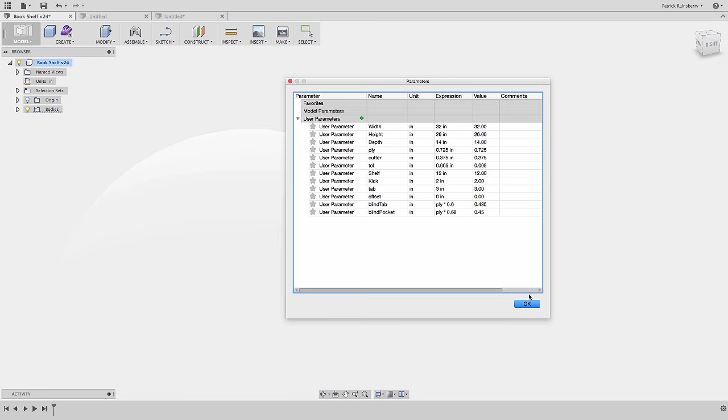Some things I didn't even end up using, like this tolerance gap, which I could reference if I wanted to put a gap somewhere. Things like shelf kick, the tab width, and also something like a blind tab, where I don't want to go all the way through the material — I'm going to say only go about 60% of the way through. So these are the types of things you create as parameters, and then we're going to use them as we go work on this design.

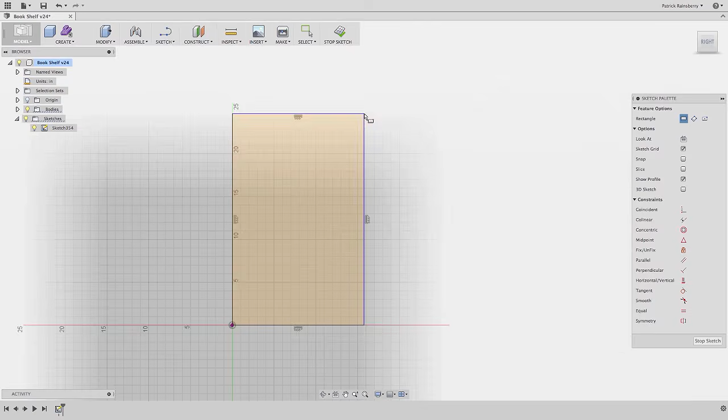The first thing we want to do in this design is create a sketch to represent the profile of the bookshelf. So I'm going to say sketch, create sketch, sketch on the side profile face, and start by creating a rectangle. We'll draw some arbitrary shape and then give it a dimension. Here we're going to leverage those parameters we created — instead of typing in a number, I'll type in the word height, and it will show me what that value is. Same here for depth.

Now I can come in and create some more rectangles, and these will define the different pieces. So the top will have a shelf, we'll have a bottom shelf, a little kick plate here, and then a piece along the back.

Now it's just a matter of creating more dimensions to define the sizes, so the thickness of all of these is going to be ply. This is one of the real advantages of adding this parameter all over the place — we'll create these dimensions of ply, and once you're ready to cut this and measure your material very precisely, you just go in and change that parameter for ply, and all of this updates, so all your thicknesses and everything else stay up to date. Same if you decide you want to change the design — we'll just type in the word kick here.

Again, we'll do up to here. We change this. This is called shelf. So if you ever want to change some of this stuff, you can just modify those parameters.

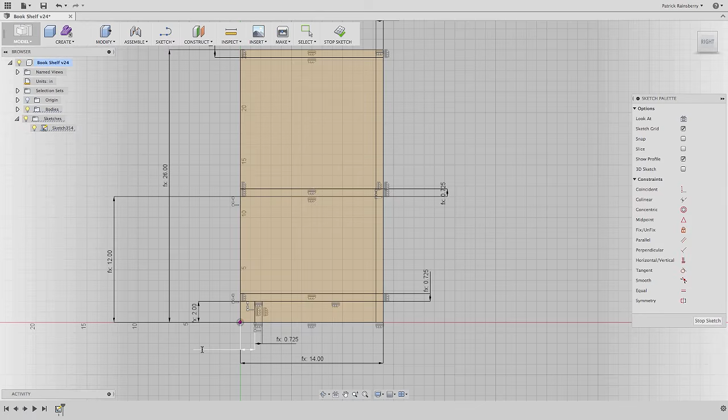If you do want to use a specific value, for example like this, maybe you just know that no matter what, that's always going to be fixed. We just always want that to be 1 inch. You can type in a regular number at any time in these dimensions as well.

And now you've got your overall sketch profile defined. Now that I have this sketch done, this kind of outlines all of the parts in the bookshelf. Now what I want to do is start creating individual components.

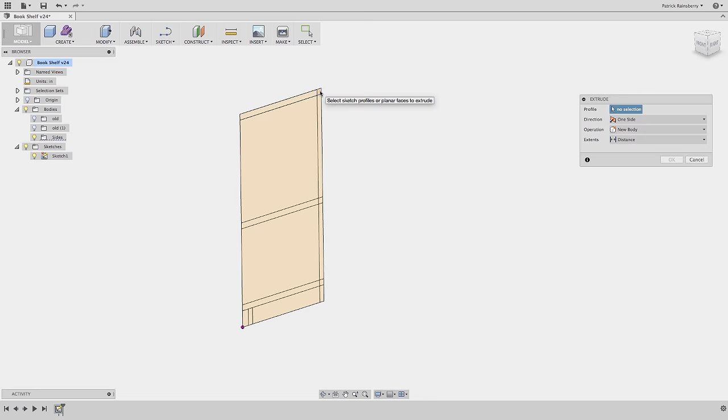So to do that, I'm going to create an extrude, and then I want to pick the sections of this sketch for the given part. So in this case, I'm going to start by creating the top. So that's going to be that profile and that.

So you should pick 2 things, and you can either just start dragging this out, but in our case we want to extrude this a specific value, and that is width. So that's going to be, again, a place where we're leveraging those parameters. You can do that here in the extrude commands as well.

And when I do that, it's going to hide the sketch by default. So if you want to do something more with that sketch, you can always come back over here to your tree. In sketches, you'll see sketch 1. You can show that, and we'll do it again because we want to create another piece here.

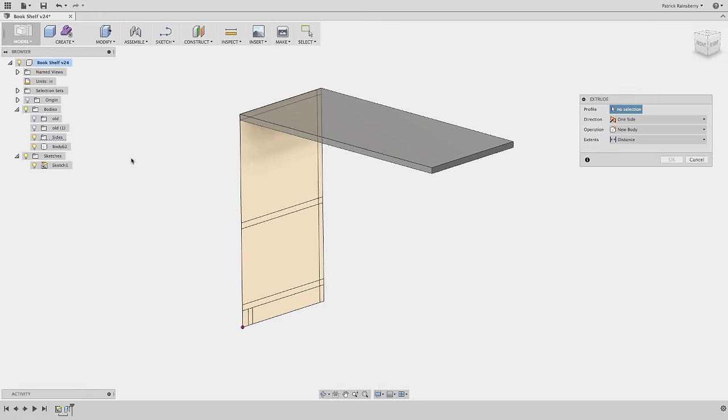So again, I'm going to say extrude, and here I'm going to create the side piece. Now this is going to be 1, 2, 3, 4, 5, 6, 7, 8, 9, 10, 11, and 12 sections. So again, this side represents all of those sections.

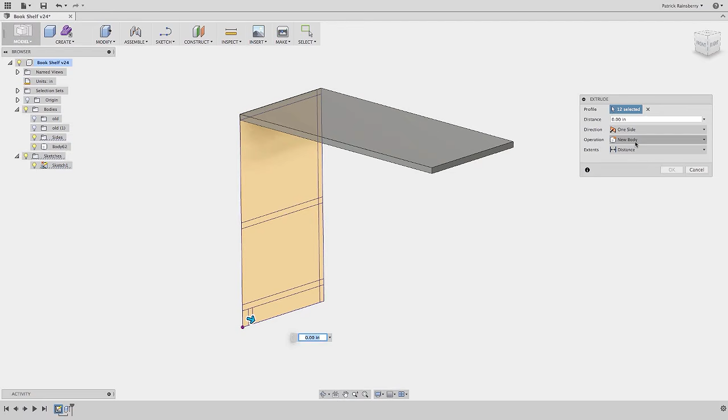So you just need to make sure that you grab all the sections, and we want to say new body, and for the distance here, this is where we're going to use that ply parameter to use our material thickness. And again, make sure the operation is set to new body. That's very important. And we'll say OK.

And then we can hide this sketch if we don't need it right now. Okay, now rather than re-sketch this, what I can do is I can just take this side piece and mirror it. So to do that, the first thing I need is a plane to mirror about.

So we're going to use construct, and we're going to create what's called a midplane. What you do here is you basically pick, say, something like this face, and then that is going to create a midplane right between it. So you can turn off all of your construction, or you can turn on and off this plane here.

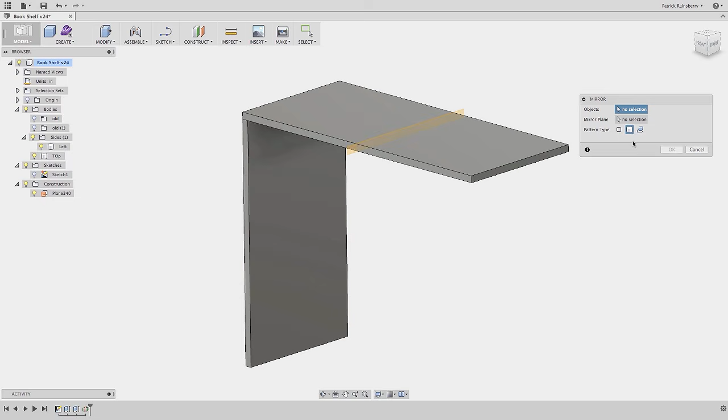That is going to be a plane that I'm going to use quite a bit through the rest of this design. And now create, mirror. I'm going to mirror. You want to select bodies in this case. So our pattern type is bodies, and our mirror plane is this one. And we've picked this body to mirror, and now we've got that part.

So that's going to be a technique that I use throughout this, which is to basically create one body and then mirror it across this center plane to leverage it over on the other side.

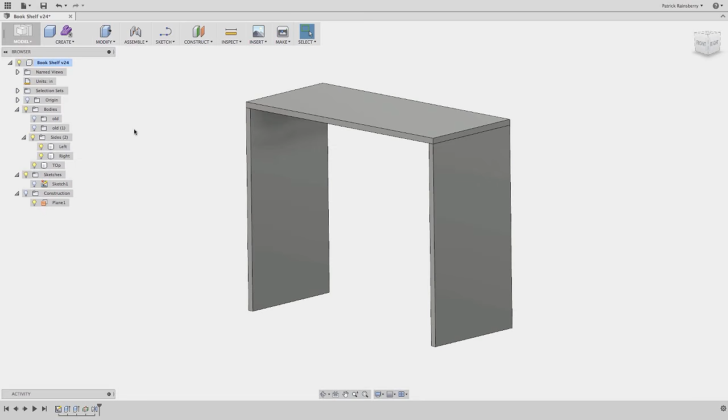So the next thing I need to do is to create the shelves and the back piece that are going to go from this inside face to the other inside face. So to start features that start from this inside face instead of from where we originally sketched it. So if you look, that sketch is actually on the outside, and we want to create some features from the inside.

The easiest way to do this is to quickly create a new sketch on this inside face, and then let's just hide some of this stuff for a second.

And I'm going to use the geometry from the first sketch, so project include. So what you're doing here is you're basically saying I want to just grab a reference to all of these lines from the first sketch. That way if anything changes in the first one, it'll be updated here.

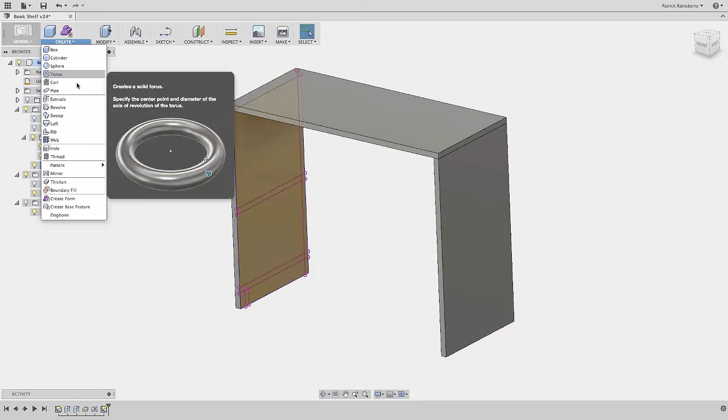And then we're going to use this new sketch to create some parts. Now we're going to use that sketch to create the rest of the components. So again, create an extrude, and here, rather than specifying a value, we're going to say we want to go up to the inside face there. That way you don't even have to worry about figuring out what that depth is supposed to be. And instead of join, again, we want to use new body. And now we've created the back.

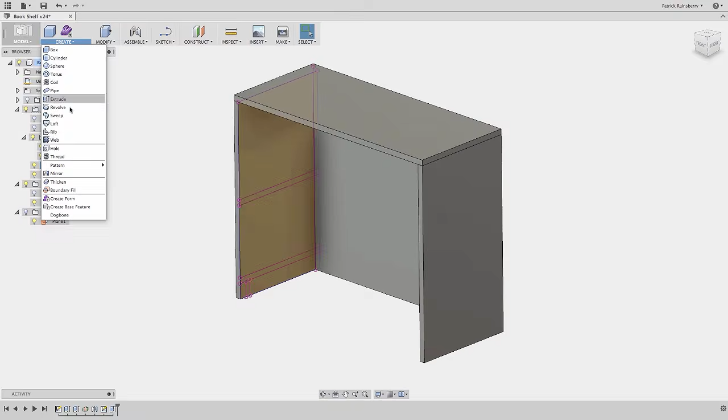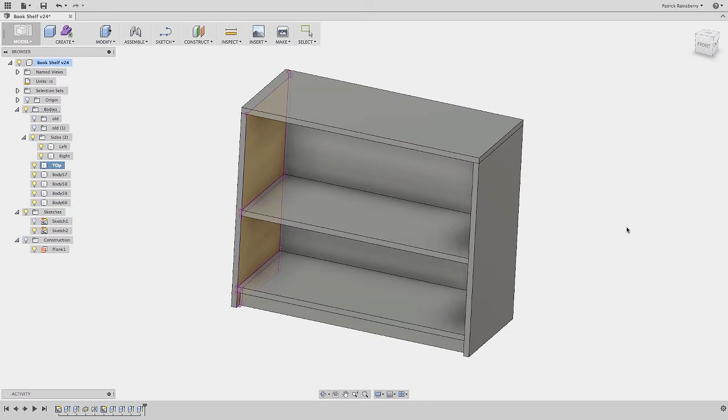Now we'll go ahead and just repeat that process. So create, extrude, and we'll pick this, which is our bottom shelf. And we will say we want to go up to this inside face, and it will be a new body. You can right click and drag up to repeat a command, which is kind of nice sometimes. So do that, say new body up to that face. And then again, down here, you can see the kick plate, and we'll go to that inside face. That looks good. And remember to always set it to new body, and we'll hit OK. Now you can hide that sketch.

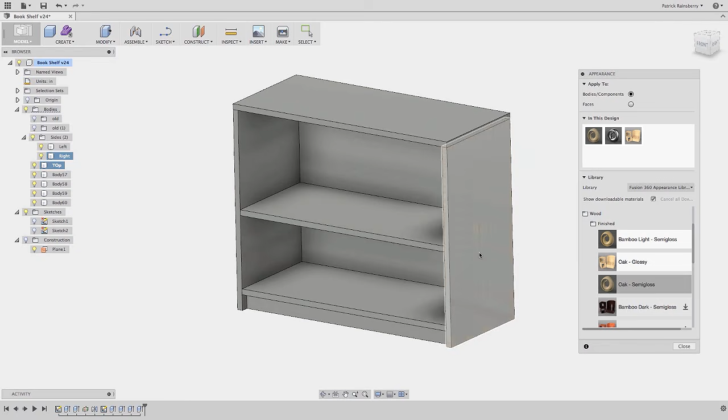Another thing that's nice to do here at this point is I'm going to apply an appearance. So again, I right click appearance, and you can browse into wood. So you can see here I've got wood finished, and I've got oak glossy, oak semi-gloss. Let's use oak semi-gloss, that looks pretty good. And you just can drag this out onto your parts. Obviously this isn't a necessary step, but it looks pretty good when you're modeling and you're kind of looking at it the way it's going to look.

I like it. So now that we have the basic parts, I want to create some tabs so that we can create the press fit joints between all of these components. So I'm going to hide all of the parts except for the kick plate, and you do this easily by selecting on the light bulbs here in the tree. Now I've got the kick, and I want to create a new sketch.

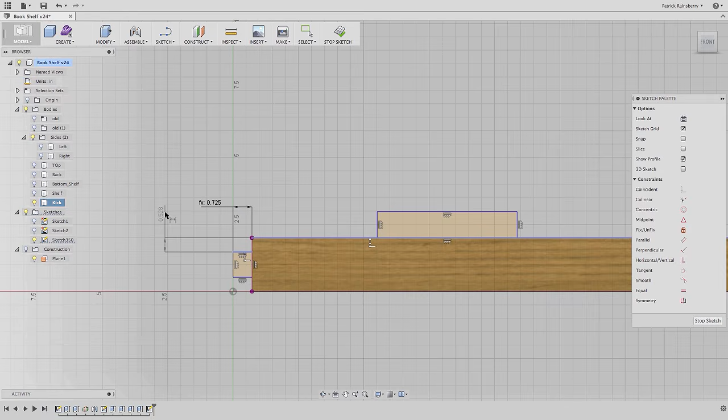I'm going to create a sketch on the front face here. I'm going to go and grab my 2-point rectangle tool, and we'll just draw these two tabs in kind of at a rough shape, and then we can go get dimension tool. So here I want the depth of this to be ply, so it's the ply thickness. Here's a nice thing we can do too, which is I can say, okay, I know that I have a parameter defined called kick, but I want this to be kick divided by 3. And then the same here. So we'll make the tab 1/3 of the depth.

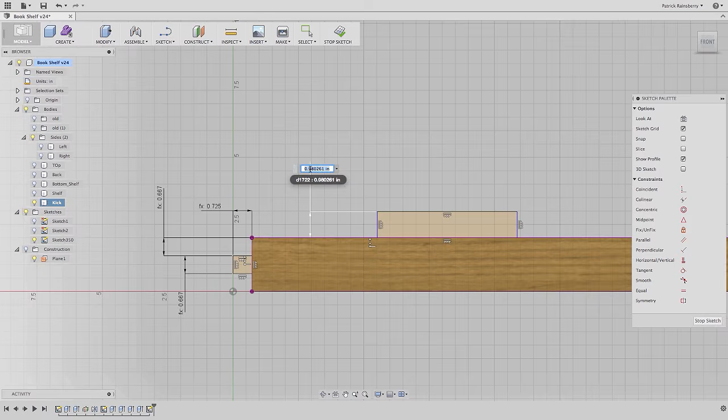So if you change that kick parameter, this will all update. Over here, also ply and tab. And another thing we can do that I use a lot is I'm going to create a quick construction line, so I'll create a line that just goes from that midpoint. You'll know you have the midpoint when you see that triangle. You can select the line, right click, say you want to make it construction. That way it's really just there for reference.

And now I can quickly create a dimension from the origin, which remember this is going to represent the actual edge of the bookcase. This is inset by the thickness of the side. So we want to go from here to the center, and then we want this to be equal to the overall bookcase width over 3. And that should put us right where we want to be.

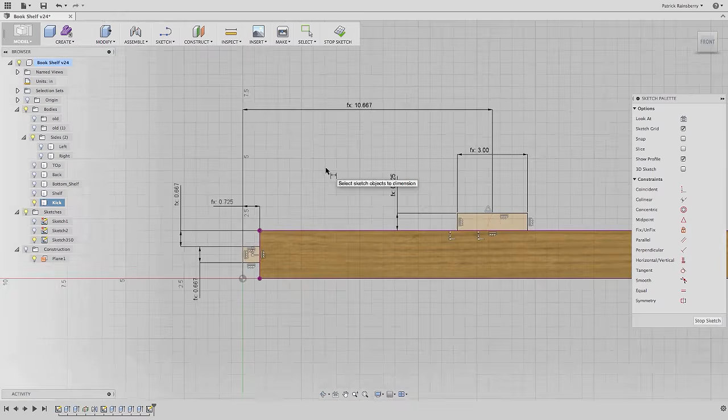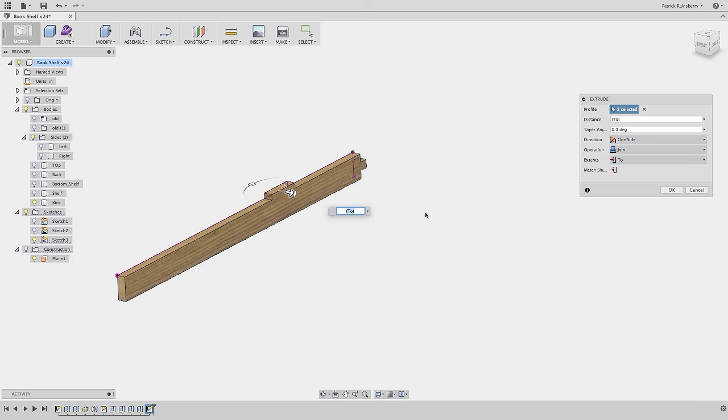Now we can use that sketch that we just created to create the tab. So I'm going to create an extrude, and we pick the two profiles. And here what I want to do is again use the extents. I want to set this to be To. I'm going to go up to that back face. And we'll go ahead and leave that as a join just so we can show one way of doing this, which is to use that as a join, and then I'm going to go ahead and create a mirror.

And there's different choices here. I can either mirror faces or bodies. Next I'll show bodies, but in this step let's use faces just so you can see the difference. So with faces, what I need to do is pick all of the faces of the component that I want to mirror, so a little more steps. So I'll pick those 3 faces, and then for the mirror plane, again we'll use that mirror plane that we created, and we get the result that we're looking for.

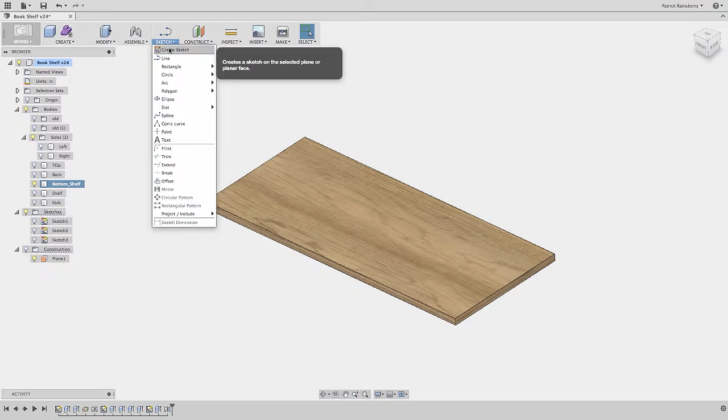Okay, so now let's create a sketch for the tabs on this shelf. So sketch, create sketch, I'm going to pick this face, and now we're going to create just the tabs on one side.

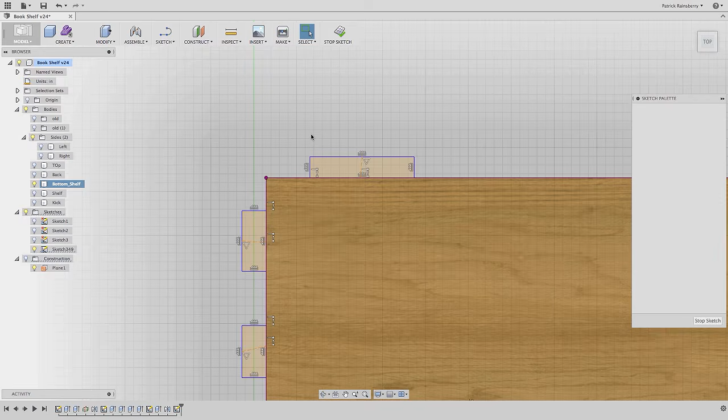And again, we'll create lines for the midpoint. I do this because it gives me a nice way to create a dimension to the midpoint of these rectangles. They don't really have to be straight or anything. Then pick them, right click, construction. Now those are just reference lines to give you that reference point at the center. It's not necessary, but I do it out of habit.

Now we'll create some dimensions, so we can leverage our parameters. The width is going to be tab, tab, tab, and then the height of all of these tabs is going to be equal to the thickness of our ply. Remember, the point of this is that if I measure my actual material thickness and modify that parameter ply, all of these tabs are going to adjust as well.

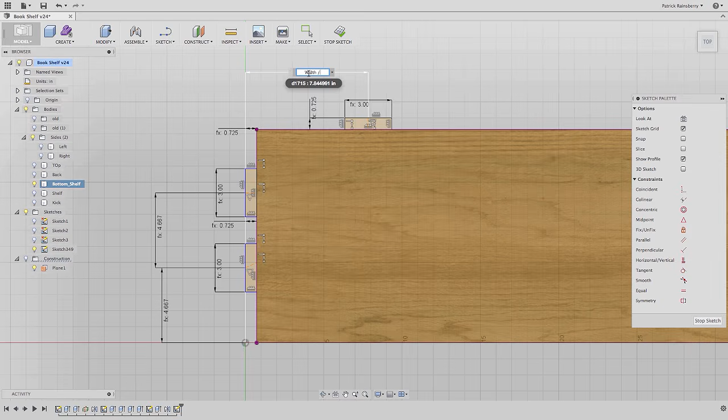So you're always going to have a nice perfect fit when you do it this way. We'll also take advantage of our other parameters here. So this is going to be depth over 3, this one will be depth over 3. Here again, you want to make sure you're going from the origin over to the center, not from the edge of the shelf. We'll call this one width over 3, and that should give us the sketch we need to create these 3 tabs.

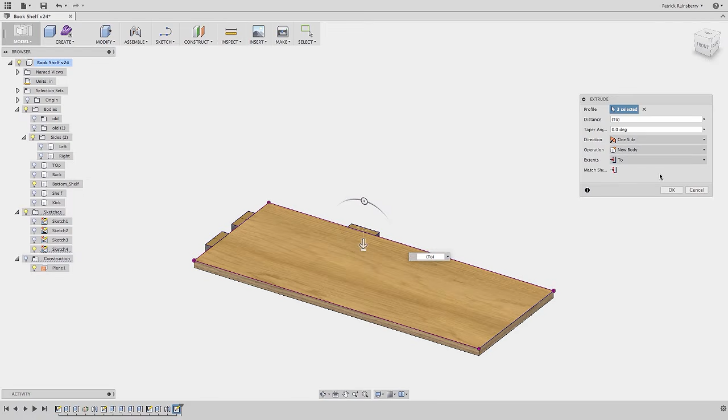Now we can create an extrude for these tabs. Grab the tabs, distance up to that face. But we want to make these new bodies because we're going to leverage creating these 3 and then mirroring them around. So we'll take those 3, then create a mirror of them, grabbing the 3 bodies and mirroring them around our construction plane here.

Now we've got these up, let's go ahead and leverage that for the shelf as well. Since we want the same exact tab pattern on that shelf, the first thing I'll do is quickly create a midplane between that face and that face, and that gives me this plane here. You can turn these on if you want. Then we can create a mirror, and this time we'll grab all 6 of these and mirror about that new midplane I just created.

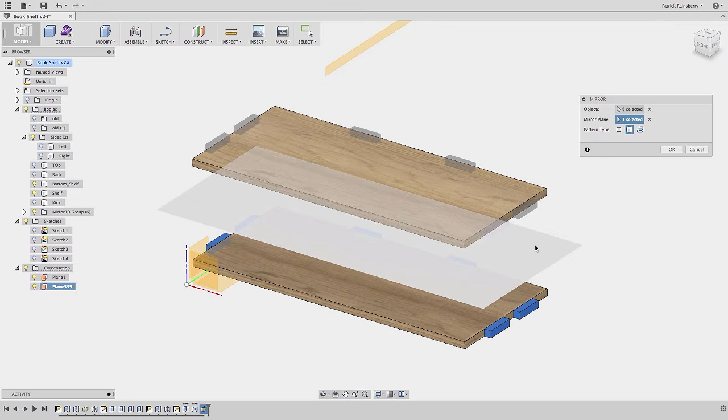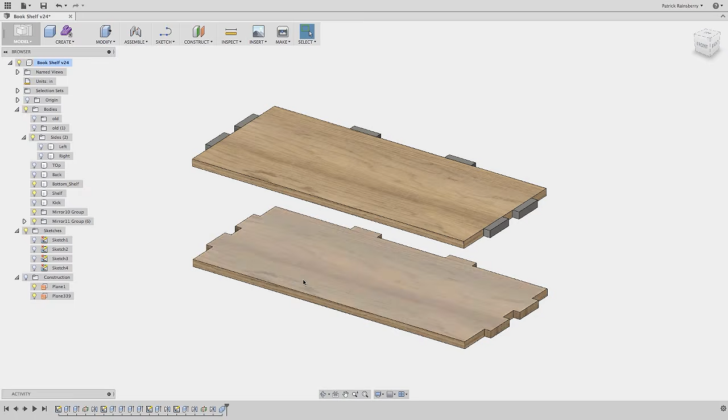Say OK, turn the view of that off. Again, light bulbs turn things on and off. And I'm going to use my combine feature, so set the target, and then all of these are the tools. Join, don't want to keep the tools. Now we've got that part that we want, and we'll do the same thing here.

This is why I like to make these tabs as individual bodies. Sometimes it's really just super convenient to mirror them around, copy them, and then combine them later. It just saves you a lot of work in the long run.

Okay, let's create the sketch for the tabs on the back. Again, we'll create the sketch. Sometimes you might want to rotate around so you're looking at this from the front so that you have the right perspective. And we'll create our rectangles. I just kind of draw these in an arbitrary place to start with, and then make my reference to the midpoint just to make it easier to dimension later.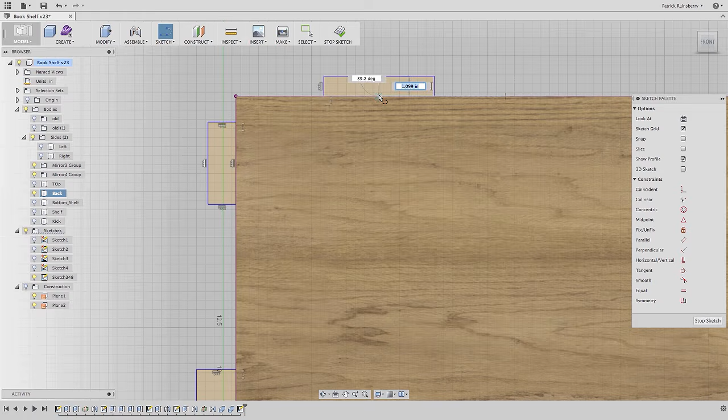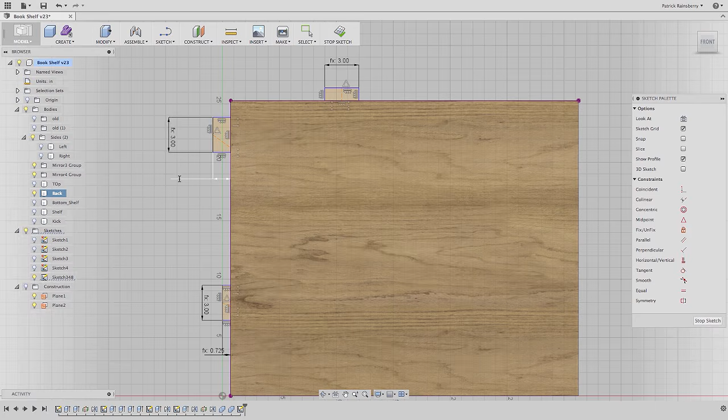And then we'll make these construction, so right click, construction, and now we'll create dimensions. Again, we're going to leverage all of those parameters. So the width of tab for all of these, and then the depth on these sides is ply, so we want that to go all the way through the thickness of our material. On the top, this is going to go into one of the blind pockets, so we'll call this one blind tab. And then for the position, we'll go from here to the center.

We want that to be height over 3. Center to center will also be height over 3. And then here, we just want to measure from the actual 0 point, not from this inside edge. We really want the outside edge of the whole bookshelf to this point to be width over 3.

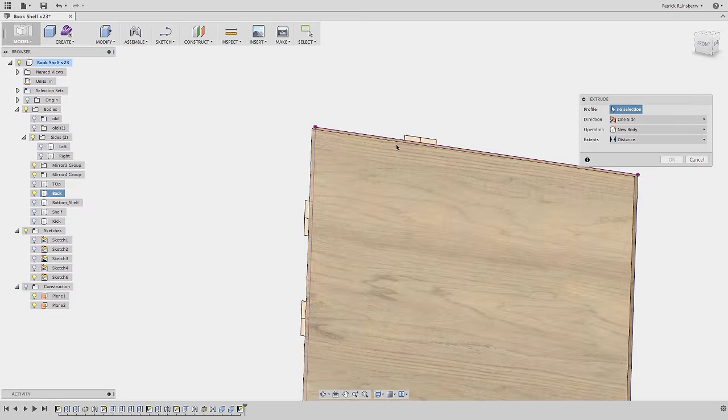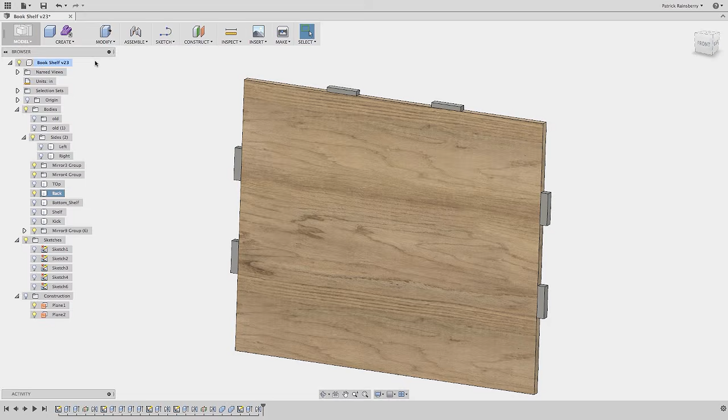And there we go. Alright, again just take these, create an extrude of the 3 tabs to the inside face, create new body. This way we can again mirror those 3 tabs about that initial mirror plane, and then do the combine. There we go.

Okay, so let's create a sketch for the tabs on the top of the side. So create a sketch on this face back here. We'll create 2 rectangles.

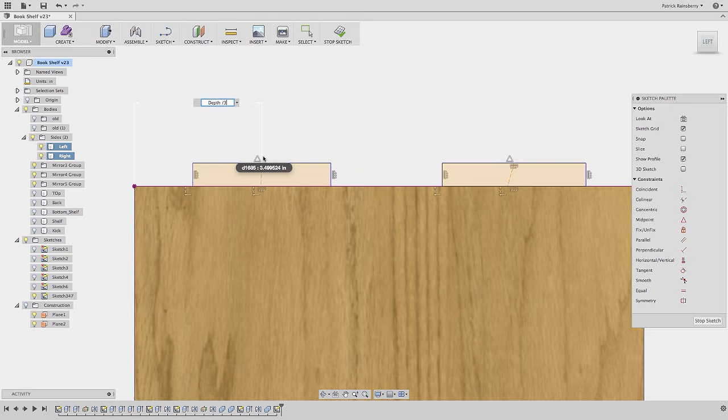Again, we'll create dimensions, so we'll create all of the dimensions that we need. This is going to be depth over 3, and then we'll just create the rest of the dimensions real quick.

Now you can see there's a little bit of a problem where we've got the tabs coming right to the edge of the top piece, so we really need to make a little bit of a lip to be able to have room for a pocket.

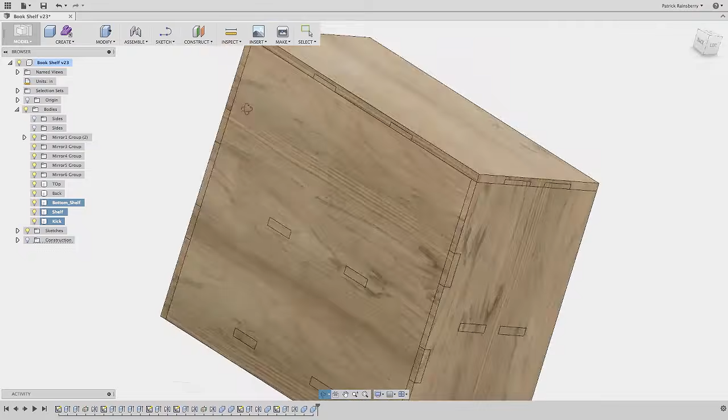Rather than try to refigure out where that could be in the design, changing sketch planes or anything like that, all I'm going to do is come in here and say modify, press pull, and now I can just grab these faces, pull them out.

We'll just go like a half inch, and that'll just give me a little bit of a lip to create room for a pocket. You can repeat that. Grab this face, move it out half an inch, and then the same thing over here.

Now we've got a nice design. Note that the width and the depth now would be off, so the width would actually be 1 inch longer than we originally defined. If you want, you could go back and modify the parameters, make a different equation, whatever. For now, I'm just going to leave it.

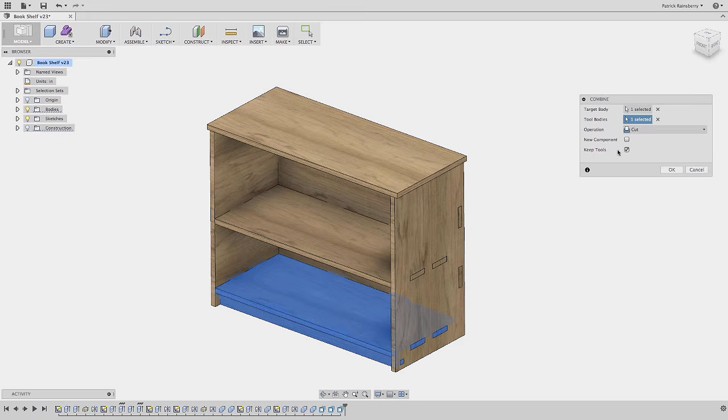Now we want to create the cutouts for all of these tabs. We're going to do that with the combine feature. So with combine, I can pick the part that I want to cut. The tool is going to be this kick, so basically I'm going to use the tabs in the kick to cut the pockets out of this bottom shelf. And we're going to say keep tools because we want to keep the part after it's done.

Again, repeating that, combine. Let's say we want to cut out the back, and the back has pockets for the 2 shelves' tabs. So the 2 shelves are going to cut the back.

Do it again. Now we're going to cut one of these sides. So we're going to cut the side, and all the parts that we need to use to cut the side that have tabs that intersect it are all of these. So say OK. Can repeat that again.

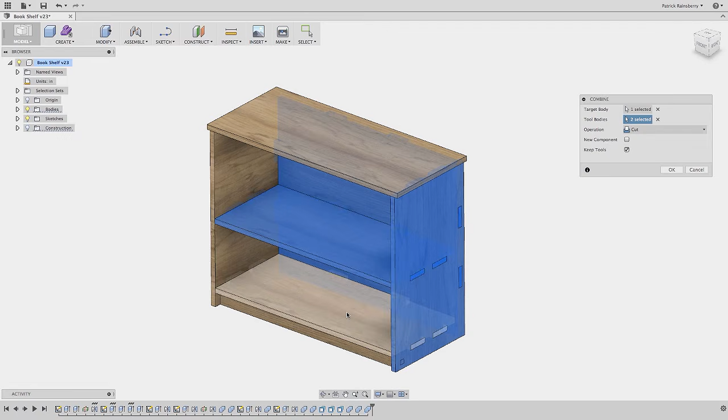Cut the right side, and again we'll pick all of the parts that are going to cut it, and then finally one more time pick the top, and we'll cut that with this part and this part.

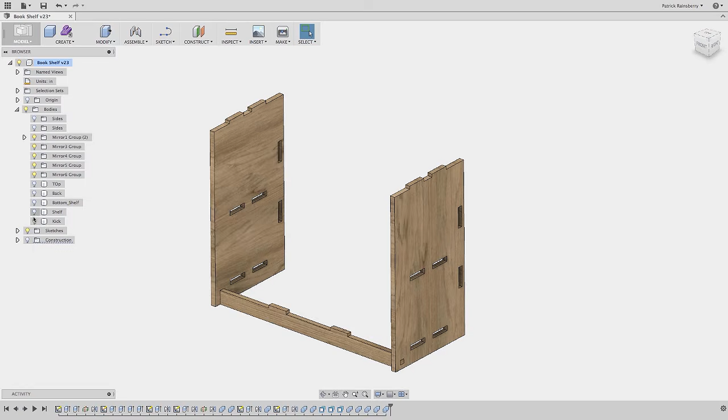So now, for example, if you look at one of these, if we were to hide some of these parts, you can see now that the sides have all of the pockets cut out.

Now that the model's done, what I need to do is lay these parts out flat. Before I do that, one thing I like to do is to just quickly create something that's going to represent the stock. So if I do that, I'll go ahead and pick this plane, and I'm just going to sketch out a rectangle. So I'm creating a box feature, and we'll make this 96 by 48.

And then for the height, we'll give it that value of ply, and then we'll say we want to create a new body. What this is going to do is just give me that reference piece to line everything up against. Now I want to take all of these parts and lay them flat.

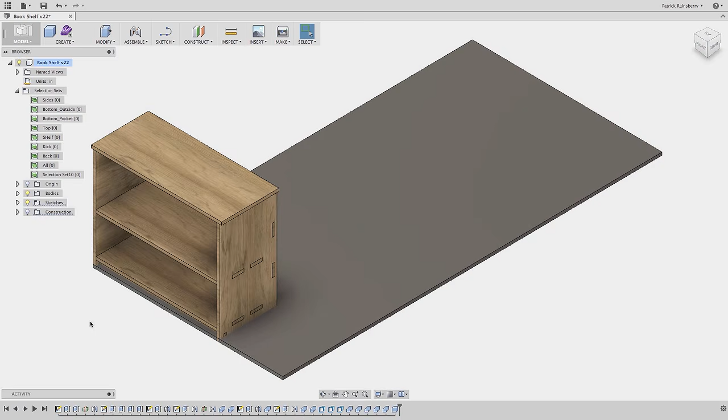So before I do that, right now we've been modeling as bodies, and what I want to do is take all of these components, bodies, and make them into components, which is a distinction in Fusion. So I'm going to select all the bodies from the tree, right click, create components, and now I could come in here and rename them.

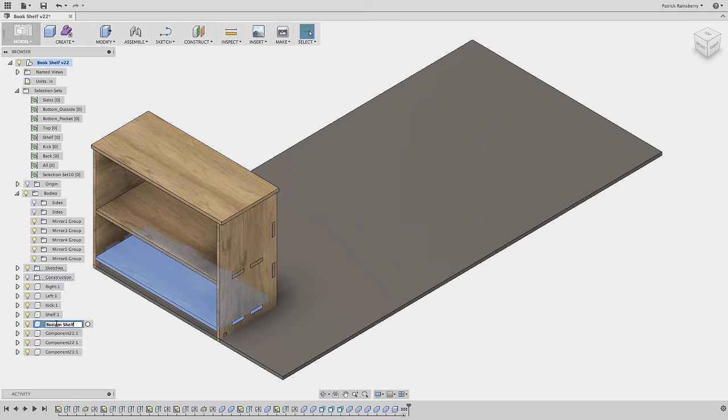Now that we have components, what we want to do is we want to create joints. I like this because it makes it really easy to move things around and lay it out in a flat pattern the way you want. It's not a totally necessary step, but it's a pretty quick and easy way to do it. So the first thing we're going to do is take this stock, right click, and say we want to ground it. That's going to basically fix that one piece.

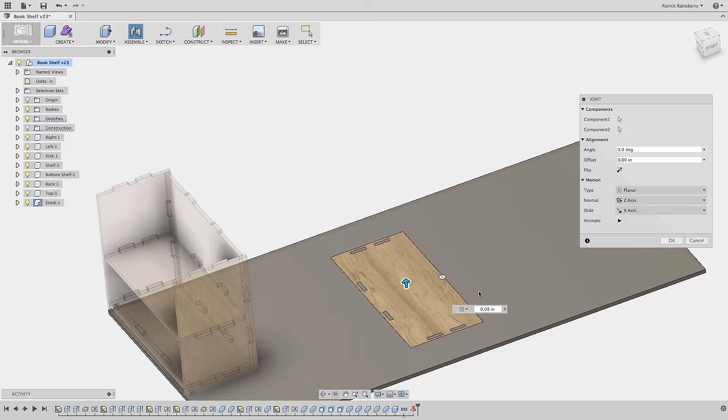Now we're going to come in and create a joint, and what we'll do is we'll pick the face that we want to line up. So that face on the top, and then we'll match that to this face on the stock, and we can set the type to be planar and then flip it, and now it's essentially lined up with the stock. What's nice about that is then I can take it and drag it around and it'll stay in that plane, so we can get things oriented the way that we want.

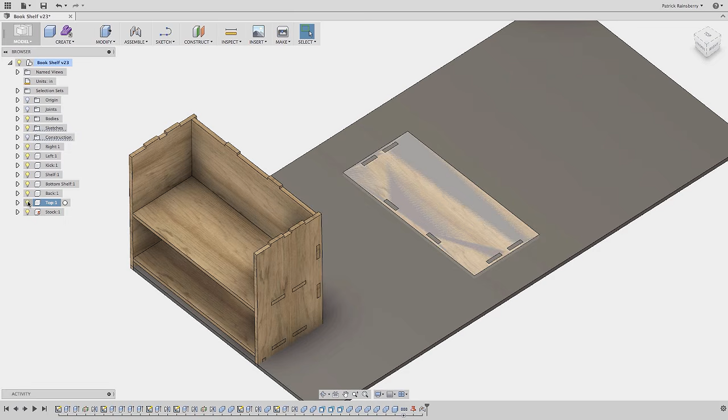Now what I like to do, just to make it easier, is to hide the one and then create the joints for all the others. So I'm going to hide this from the tree, and now we'll go ahead and start creating all of the rest of the joints.

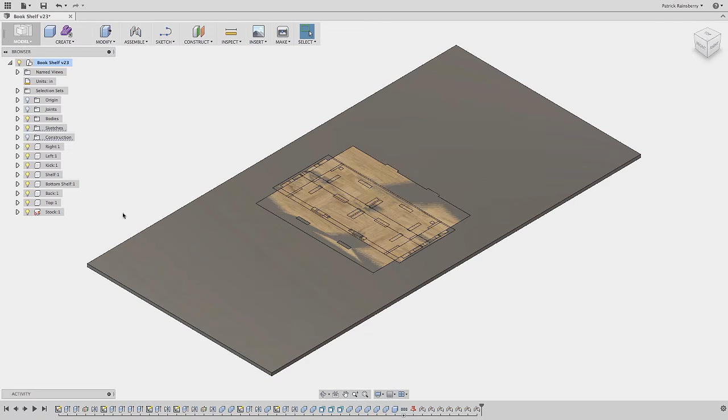Now that we've applied all the joints, we can just drag these things around in the plane. One thing that makes that a little easier is you can right click on the stock and make it selectable, unselectable. If you do that, you see the little red crossed out circle. That means that it's not going to be selectable, which makes it easier to just pick all of these parts without that getting in the way.

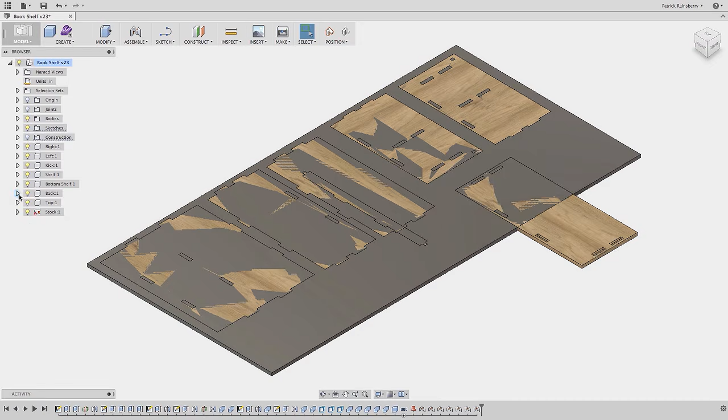And you can just grab all these parts from the bookshelf and drag them around to lay them out on the sheet. If you want to do something more, if I want to rotate it, the best thing to do is to pick it from the tree. That way you have the component selected, and then hit right click and say move. Now you can do things like rotate it, and you'll notice that it snaps to 90. You can still drag it around while you're in this command, and then hit OK.

And then maybe the last one I want to do is take this guy, and again I'll grab this and say move, and we'll go ahead and rotate this one as well, and then move it into place. Now I've got all the parts laid out flat the way that I want.

Now that we've got this all laid out, what I want to do is apply dogbone fillets to all of these internal edges. We've got a nice little add-in that somebody wrote, Casey Rogers, which allows you to create dog bone fillets, and we can either apply this to each edge individually, so I could pick all these edges, or you can actually just pick the bodies, and if you pick a body, it's going to find all of the vertical edges that are inside corners and apply it to all the edges.

Another thing we're going to do here is just put in our parameter of cutter. This way, if I change my mind about what cutter size I want to use, it will adjust the dog bones accordingly, and we'll just go ahead and hit OK. This is going to take a couple of minutes to process, so just be patient if you're processing like this with 150 something edges.

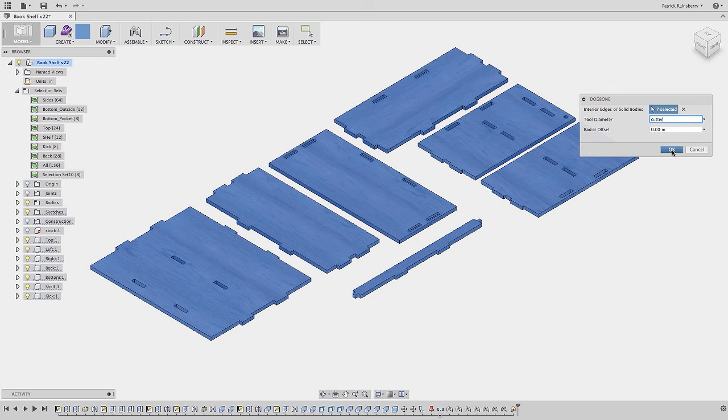And here we can see the result of the dog bone fillets being applied to all of the internal corners. Pretty nice.

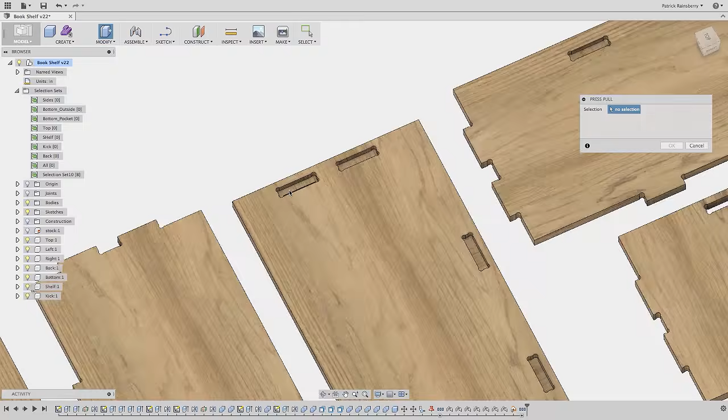Okay, the last thing I want to do is create a little bit of clearance in these pockets for the blind tabs. They're currently modeled exactly flush. So I'm going to do a press pull, and then I'm going to pick all of these faces, and then we're just going to offset them down just a little bit. You see I can just drag this as much as I want. We want to make sure you do a minus 0.04, whatever clearance you want, but the important thing is to put in the minus sign so that you know it's going in that direction.

Okay, so now that we've got this all set up, the thing we've got to do is create toolpaths. I'm going to switch over to the CAM module, and now we can start creating it. So what I want to do is create a new setup. So setup, new setup. The first thing we're going to do is define our origin.

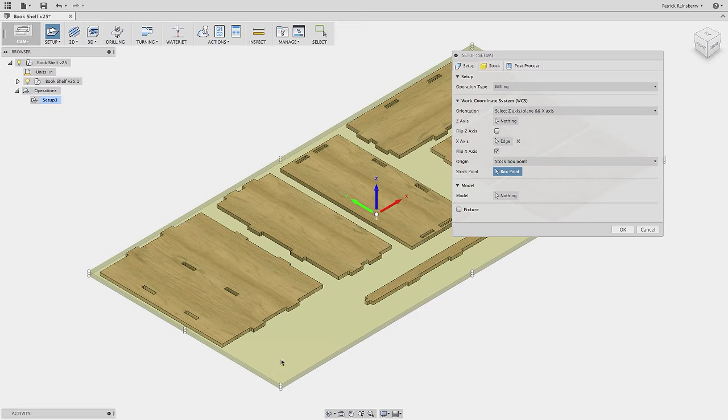So we want to set the direction of X. I do that by clicking on the back half. Notice you can pick the back half or the front half of these arrows. Click the back half of the arrow and give it something to reference just to get the direction oriented, and then I'll click the front half to switch it. Then I can click on this point right here and say I want to align it to the lower left corner of my stock.

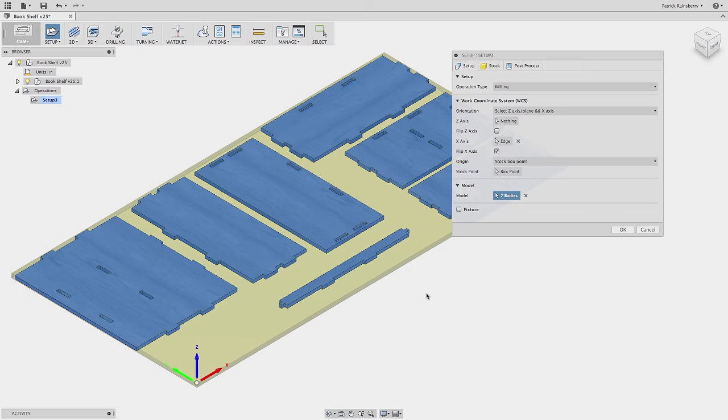Another thing you should do is select on model. This way we're just going to define exactly what parts we're cutting out. Maybe you have some extra bodies, extra parts, that reference model of the stock, things like that that you don't necessarily need to be computing toolpaths for. We just want to do it for this. So we've selected our models.

Now we're going to go over to our stock and give it a specific size. We know that this is 96 by 48. And then the height, again, this is the other place - you need to change it over in the model on that ply parameter. And then here in height we need to set it as well, so we're going to set it to something that we measure.

So again, you want to measure your stock very precisely and then input it here. And this is just another small thing - you want to say offset from the bottom in -Z0. As long as this and your ply parameter were the same it wouldn't matter, but it's still good practice, I think we've noticed.

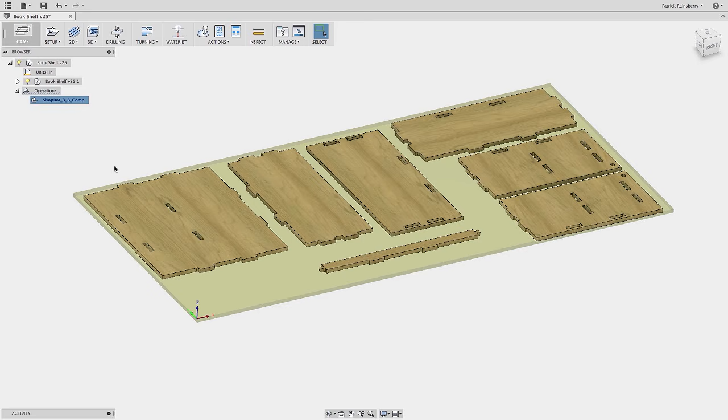One thing I like to do is name the setup with the tool I'm going to use. So I know this is going to be for a ShopBot, using a 3/8 compression end mill. That way, if I'm going to use multiple tools, I'll create a setup for each tool, and all the operations for that tool will go into one setup. It makes it really easy to post it out in groups and run one program at a time on the ShopBot. I like to run one program for each tool, do the tool change, then run the next program. For me, that's what's been working really well.

So now I'm going to go ahead and create the first operation. The first operation is going to be to create a 2D pocket. We'll do that here - I'm going to create a 2D pocket to cut out all those blind pockets.

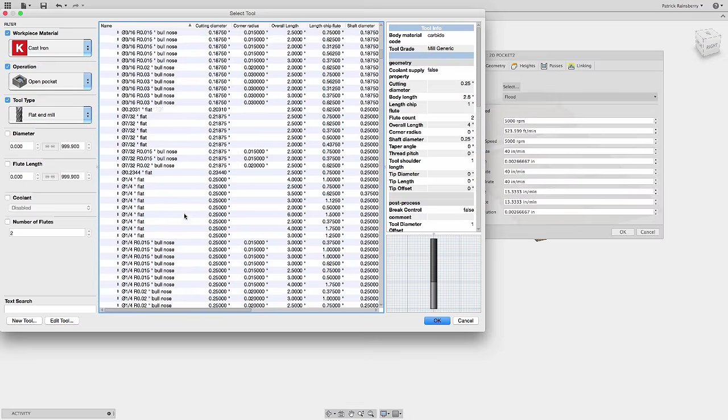We'll pick a tool. In this case, I'm not really worried about getting the exact parameters of the tool, just because I want a generic 3/8 cutter. All I'm really worried about for right now on the router is just getting the tool diameter right.

And then I can set the spindle speed, I can set my feed rate. In this case I'm going to use 60. And then I could set the lead-in feed rates as well. It's going to do a little calculation for me and let me know what my feed per tooth, or my tooth load, is as well, which is kind of nice.

For geometry, now what I need to do is pick the exact pockets that I want to cut out. So here I'm going to pick these pockets - again, all my blind pockets.

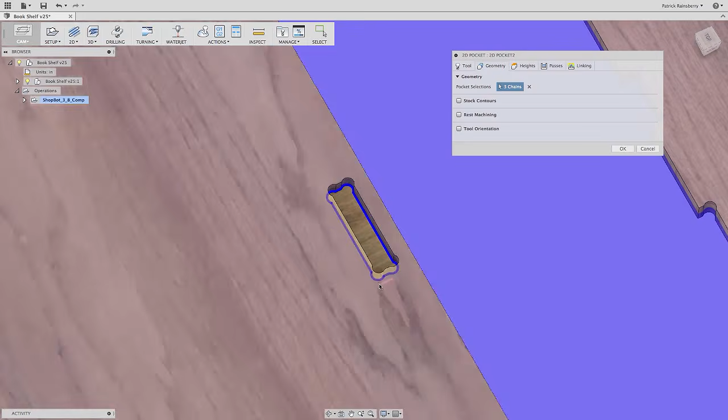Now this happens sometimes - you got to notice this arrow is on the outside of the pocket. You need to click it and it'll switch the directions, basically saying which way, am I going inside or outside on that edge you just picked, and I want to go on the inside. So make sure that on all of these pockets you pick, you always make sure you're cutting to the inside of the pocket, not the outside.

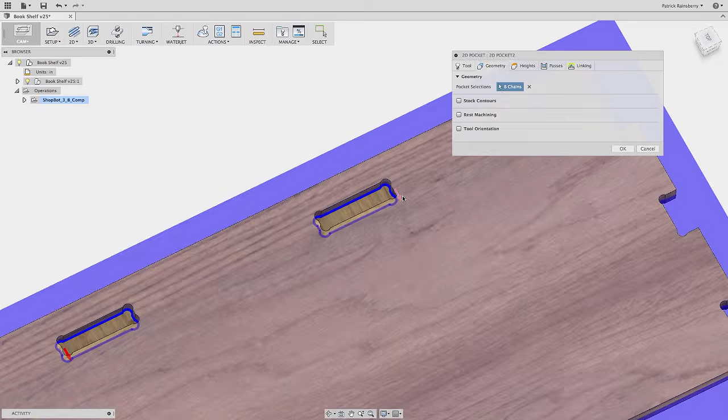And we'll get these last two from this part. So remember, there's 6 on the one, and then again, I need to flip this, and 2 on this one. So the first thing I'm going to do is my blind pockets that I want to completely clear out.

Okay, heights, we don't really need to change anything here. Under passes, there's a couple things you definitely want to change. We want to do right conventional milling. Climb milling is more for a very rigid CNC machine doing high precision metal cutting. The other thing we want to do is a step over.

So if you want, you could just step over by the entire tool width, or you could cut this down. It's a personal preference, I believe. For stock to leave, if we were going to come back and do a finishing operation later, we would maybe want to leave a little bit of stock if we were doing like a 3D contour thing. In this case, we're just profiling out these pockets, so we don't need to leave any stock.

But what we do want to do is take multiple depths. So here I'm going to set the step down to be half the cutter diameter, seems to be about the rule of thumb. And for a finishing step down, we don't really need an extra finishing pass here, so I'll just set that to be the regular step down I want. That way we'll basically take steps all the way down to the bottom of the pocket in half the cutter diameter. And then the last thing is over on linking.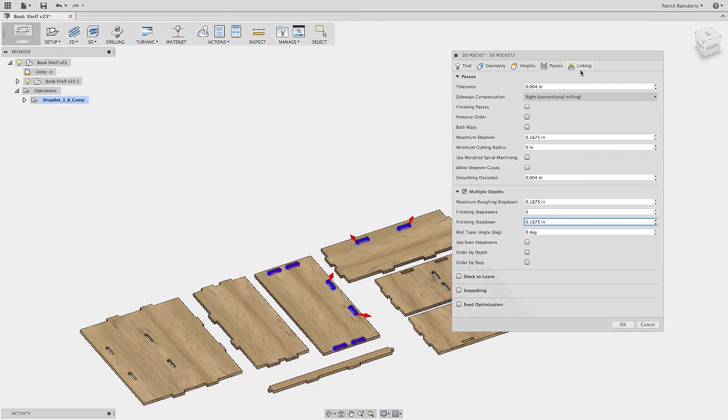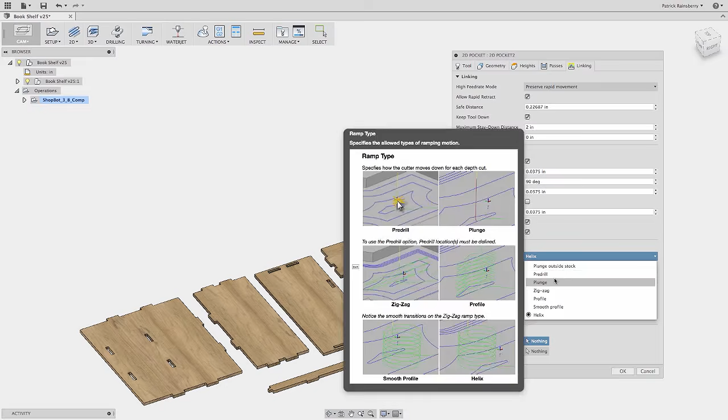One thing that I like to do here is ramp. This is how the tool's going to enter the material. You can see a nice preview if you just hover over the option, you can see what options you have. So you can see here pre-drill, plunge, helix, etc. Helix is nice if you're trying to enter into a very hard material like aluminum or something. But in this case, we're just going into plywood, so we'll just do a straight plunge, and it's much faster. And with that, we'll say OK, and we get a preview of the toolpaths.

You can see here what the tool is going to do as it goes from pocket to pocket. So the next thing I want to do is cut all these through pockets, and I'm going to do this using a 2D contour. A 2D contour will come down and just cut the profile. If the cutter was less than half the width of this pocket, you'd actually end up with a little sliver in the middle, in which case you might want to use a pocket. Doesn't really matter, you could use a pocket here or a contour, it's going to accomplish the same thing in this case.

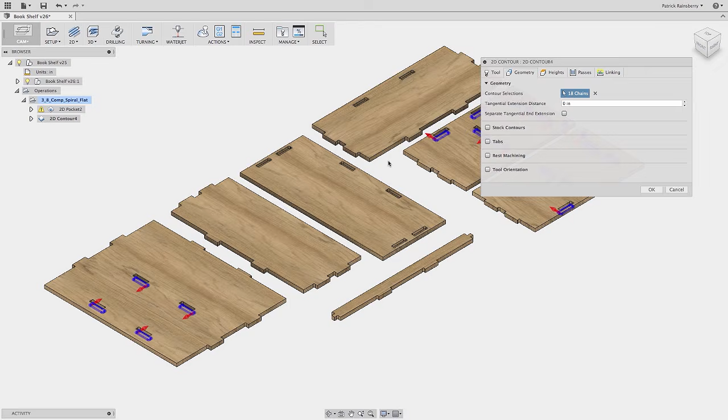But again, I would say 2D contour, and I've already got it set up here so you don't have to watch me pick all of the pockets. I'm using the same cutter, set my feeds and speeds. Under the geometry, you can see that I've picked that. What you always want to do is just pick one edge on each profile, and it'll find the profile. And then again, make sure the arrow's on the inside of all of these pockets, not the outside, or else you'll end up with the cutter going around the outer profile.

So in this case, there's 18 of them. Heights, nothing to change. Passes, same adjustments that you made on the previous pocket. So I want to definitely say I want right conventional milling. I want to set the maximum step down to be half the cutter diameter, and same for the finishing.

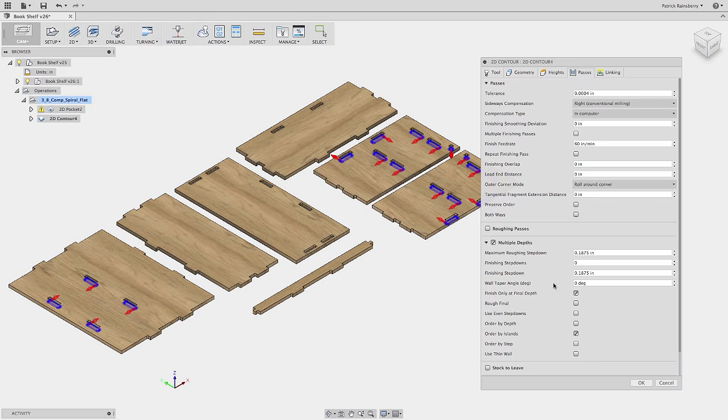And then on linking, I just turned off ramp. If you want, you could ramp in, doesn't matter. It would maybe be nicer if you did a little ramp on the way in, you could say you want to come in at an angle. And you can see the result there of those pockets.

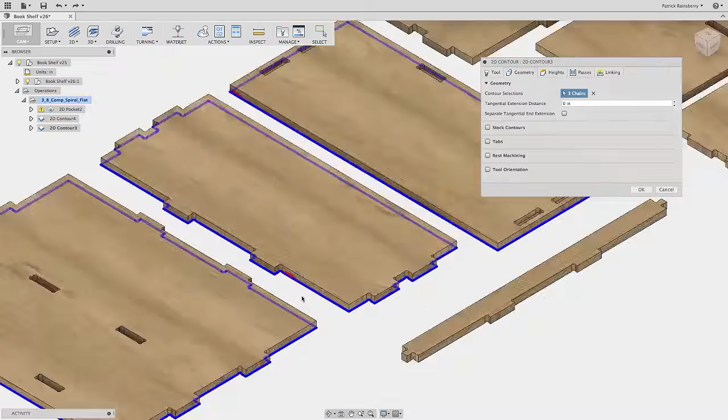So now what I need to do is cut out the actual pieces, the outer profile. Again, I'm going to use a 2D contour to do that. By default, it's picking the last tool I use, which is good for me here. Then for the geometry, I'm going to pick all of the contours, so it's these profiles here. Should zoom in and make sure that these are going in the right direction. So again, some of these were on the wrong side.

And here, all good. So now I've selected all the profiles that I want. Now on this one, I want to do something else a little different.

I want to add some tabs. We're going to add tabs to keep the parts from flying off once they're fully cut out. We can either do rectangular or triangular tabs. I'm going to do a triangle, 3/4 by 0.185, just under my step height. I could either say by distance, which would put these every 3 inches on any side that's at least 3 inches long, or I'm going to say by points.

In this case, what I can do is come in and specify, I'll just pick, say 4 points on each part, where I want to put the tabs. This way you can specify it yourself. Fast forward for a second, and you can see I've picked all of the places for my tabs. So all those white dots represent where a tab is going to be, like I've just placed them. In this case, I've got 28, 4 per part.

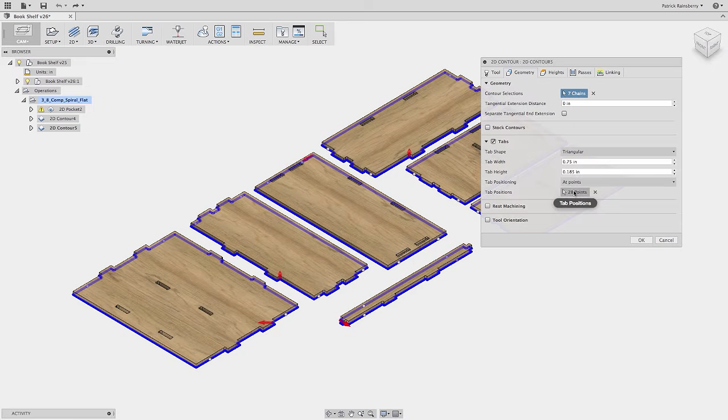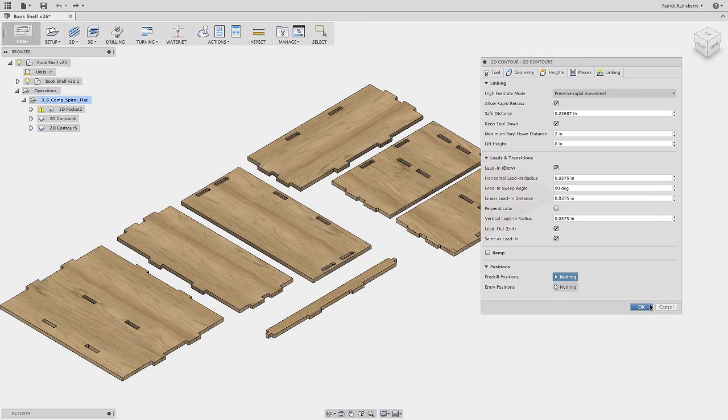Under passes, again, make sure you set it to right, conventional milling, and we're going to set the depths again, so multiple depths, going half the cutter, and under linking, just taking the defaults here as well. With that, we'll say OK, and now you can see, again, the blue lines represent a preview of the toolpath, and you can kind of zoom in. You can see here the tool is going to take that little jump right there, the little jog to make the tabs. Looks pretty good.

Once you've created all the toolpaths, the nice thing to do is be able to simulate it. If you select an individual toolpath, you can simulate just the one, or you can select the entire setup folder and press simulate, and you can turn on the stock, which I like to do. What that's going to do is let you actually show the material being removed. When you press play, it'll show you the material being removed.

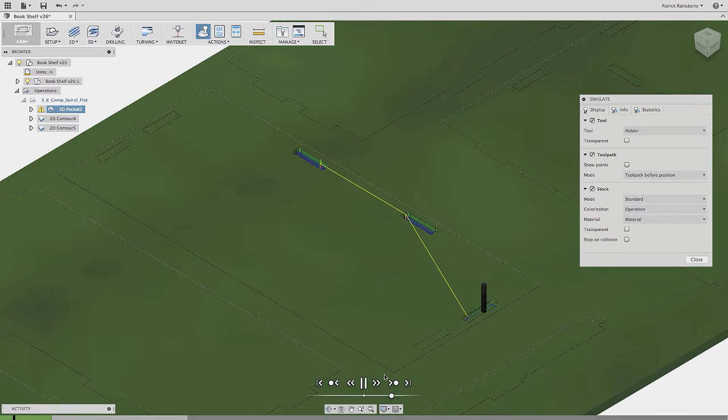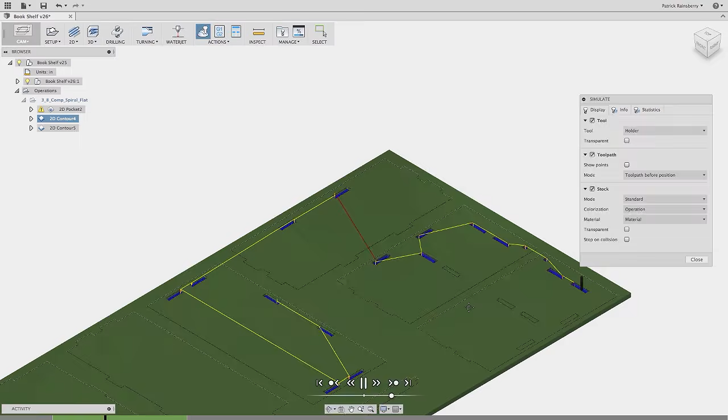You can do things like skip just right to the next operation, so done with the pockets and now it's doing the through pockets. This is nice to just see what's happening. I've caught many errors by looking at the simulation and realizing the tool is going and cutting somewhere that I didn't expect, or it's cutting the wrong side, or it's not finishing where you thought it was going to be finishing. The other thing you can do is just jump to the end, so after it's done everything, and then you can take a look at what you're going to be left with.

So here we can get a nice visual on, you know, where are my tabs? Are they in the right place? Do they look good? Does it look like they're all done? Is there a big chunk of material left in here that I wasn't expecting? All those types of problems that you might find once you're cutting, you can find here in the simulation.

And once you're done simulating, same thing. Again, you can either post out an individual operation, or you can post out the entire setup, which is why I like to do one per material, or one per tool. And now I'll pick this, and I will say post process.

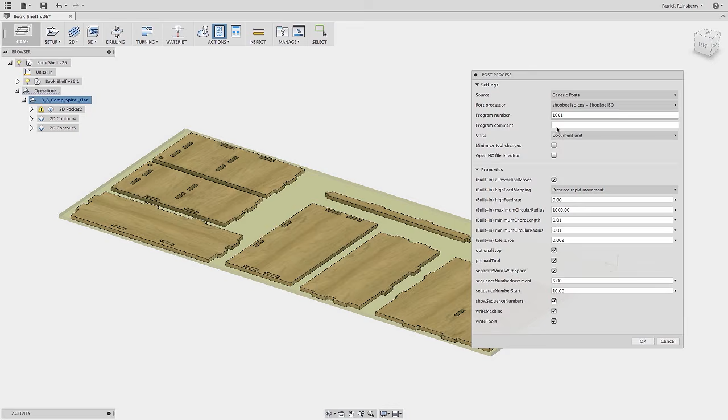Here I can select either any post processor. In this case, we have two for ShopBot. One that'll create OpenSBP files, so ShopBot language, and then regular G-code, the ShopBot ISO post. If you want to go in and adjust here in the properties, if you have some specific properties that you want to adjust for your specific machine, you can change those here. In this case, I'm going to take the default and export this G-code.

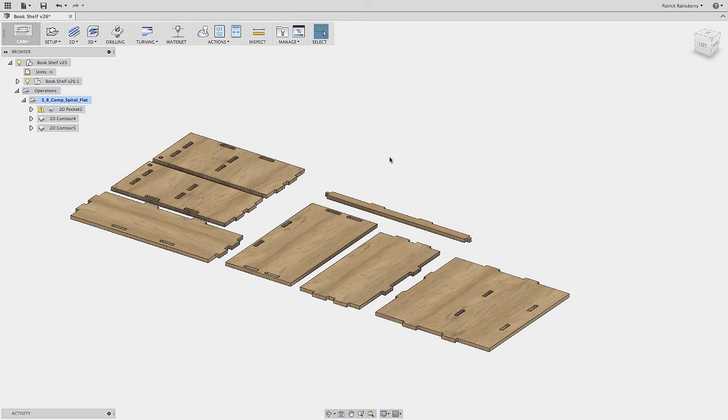We'll overwrite the one that I have, save it off somewhere where I know where it's going to be, and then, if you're not doing this on the machine that you actually have hooked up to your ShopBot, you can then just take that, put it on a USB key or whatever, move it over to the machine and load it into the ShopBot controller and run the job.